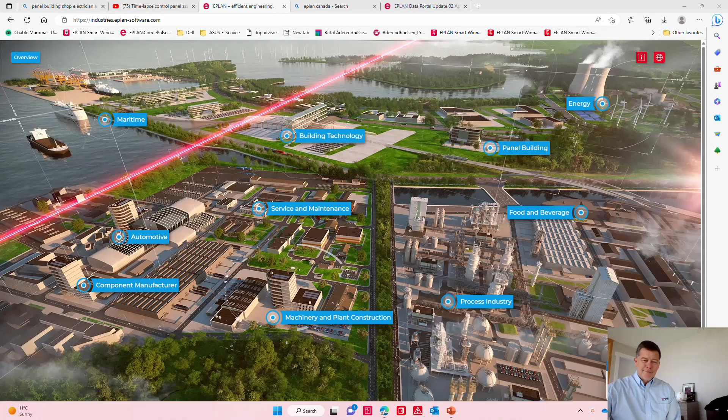Today I want to talk about something that is common to all these industries. If you look up our industries and where you can find some EPLAN Rittal, you will see something that is always commonly coming up. It's the panel shop. The panel shop at one point in time will always be part of the game.

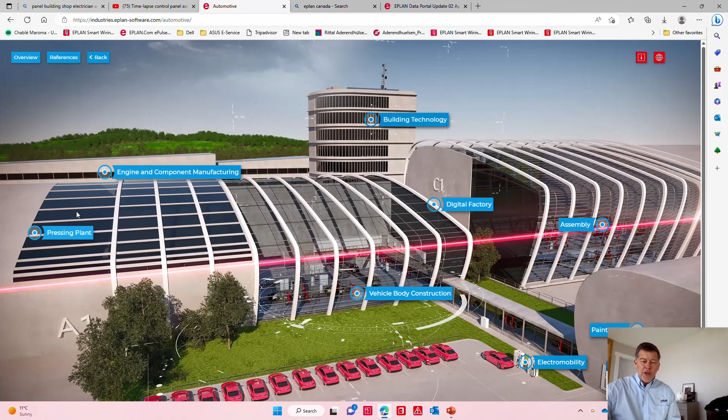So technically, I can take any of these industries. They always have sooner or later the specific panel building. So I can go through the individual areas, but at one point in time, every one of these industries comes down to this common denominator. They all have a switchgear and panel built.

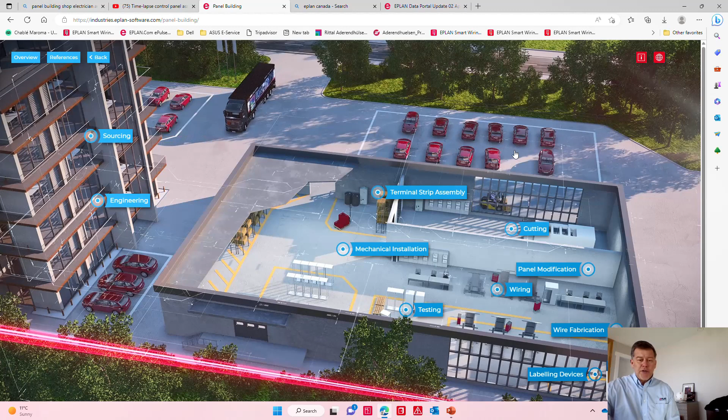So what I want to talk about today is how can we take this process that is here mostly done manually. And if you look in most of your shops, you will see this is all done manually. How can we actually optimize it? So technically, let's take a look here at this, and you will see I will be talking primarily about the Rittal integrated value chain.

So in the switchgear and panel building, we often will also talk about the efficient engineering when the plan becomes EPLAN. But really, you know what? It starts by optimizing your own manufacturing process. And we often don't think about this. The outcome, you will be able to deliver 33% faster by prefabricating wires. This is really the outcome of this.

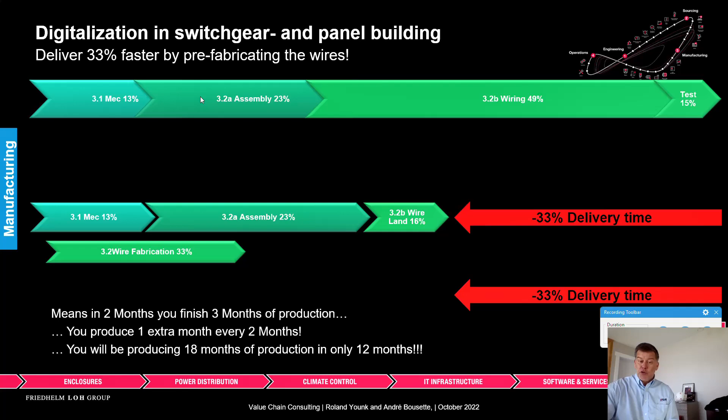What I will show you in this video is how we can save 33% of delivery. In other words, every 2 months, you have one extra month that can be produced. Think about it. 18 months of production in only 12 months. So of course, let's take a deeper dive into this.

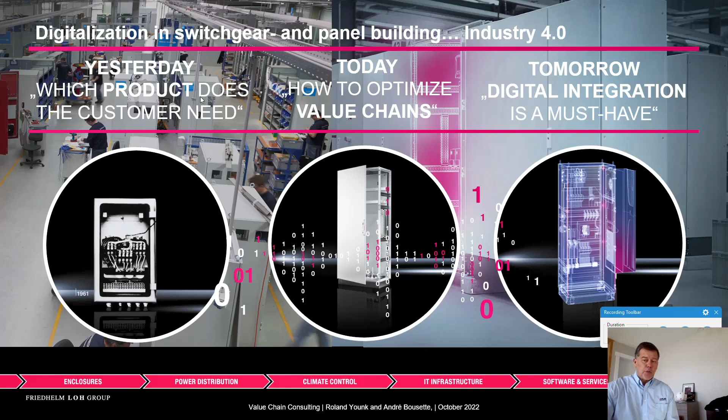First of all, yesterday, today, and tomorrow, we all know that within Industry 4.0, there is some digital integration that is a must-have, right? But let's talk first about the challenges every one of us in all industries faces. We all have increasing price pressure. We all have difficulties finding good personnel. We have the request from our customers to always deliver in shorter periods of time. And honestly, when we look at it deeper, we may have some inefficient operations. But let's take a look at how we can help you there.

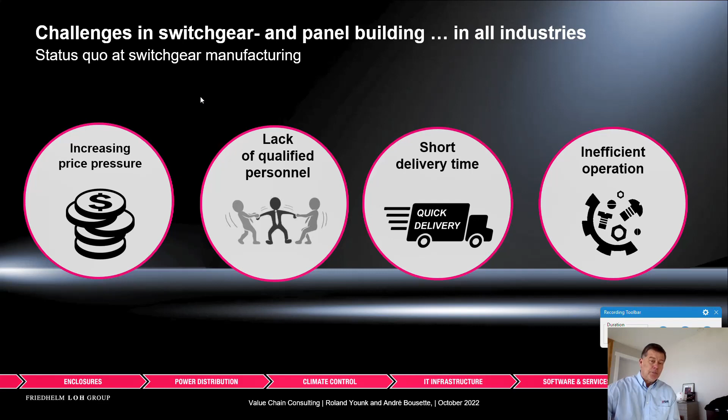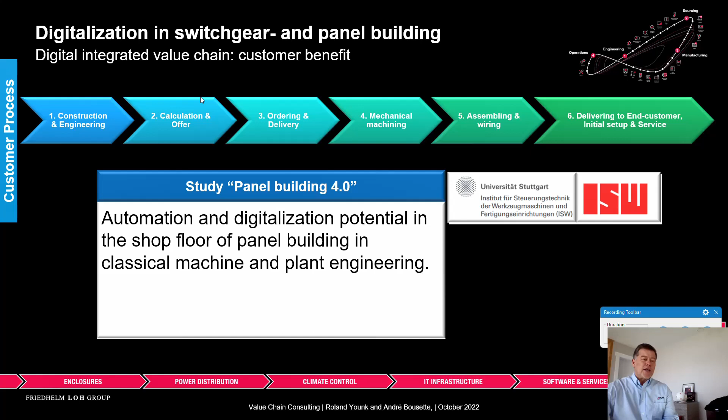So this is all based on a study that was started at the University of Stuttgart. So the numbers that I'm putting out here are not just randomly taken. They actually come from this study. I'm just going to recap this a little bit in this integrated value chain, and I'm going to talk about the digital workflow, because this is really where everything happens.

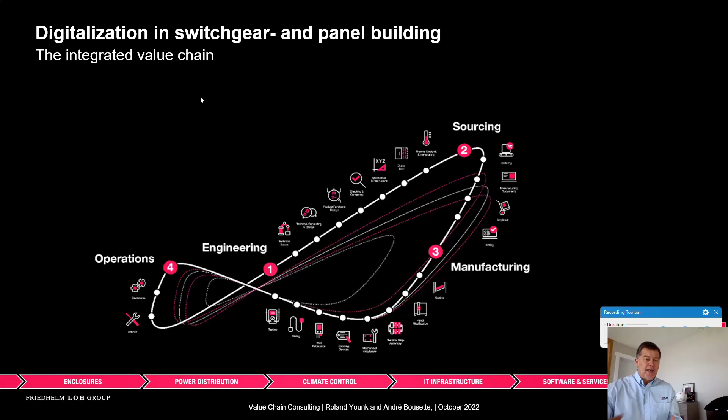The idea is, digitally, you want your data to serve everyone: the engineering people, the sourcing people that will be buying the components, the manufacturing people that will need it for drilling and cutting and eventually even wire preparations, even labels, and even for the operations for cables. So the idea is, let's make sure that the data that we actually use is always ready for the next step, so that every individual user only adds some real value to it and does not repeat any of the data that was already there.

And it really starts with this data portal, which is a cloud solution in which 438 manufacturers participate today. They have created over 1.4 million data sets to be used, dragged and dropped into your design, with the proper data to actually do the manufacturing afterwards. So technically, this is a little bit the global picture of how it works.

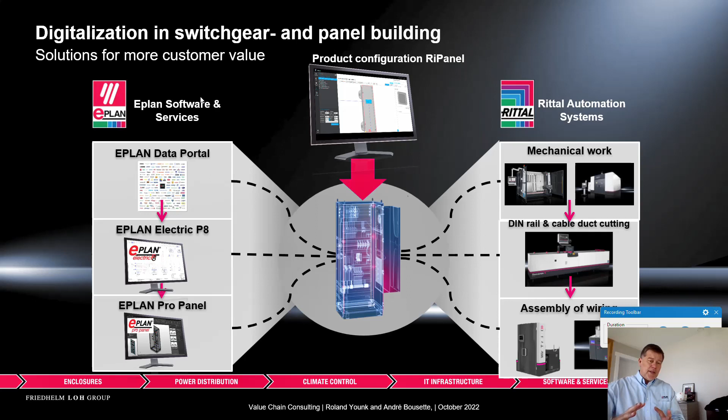The data portal provides you the parts, and the electrical schematics are done with Electric P8. Within Electric P8, you can also have ProPanel. ProPanel is the digital twin, and from that digital twin, not only do you have a perfect digital representation of your panel and its sizing, but you can also extract all the data for all the mechanical work afterwards, like drilling, cutting ducts and rails, and even cutting the wires. So this is the global, let's say, digital picture of what we offer.

Now, step by step, we try to organize this. We have come up with a certified system integrator concept in a 3-step process where we actually bring you to be better and better. Let's start with the first step. Everyone knows that today in classic design engineering, you have to do some schematics, some device tag numbering, some wire numbering, some cross-referencing, some bill of material.

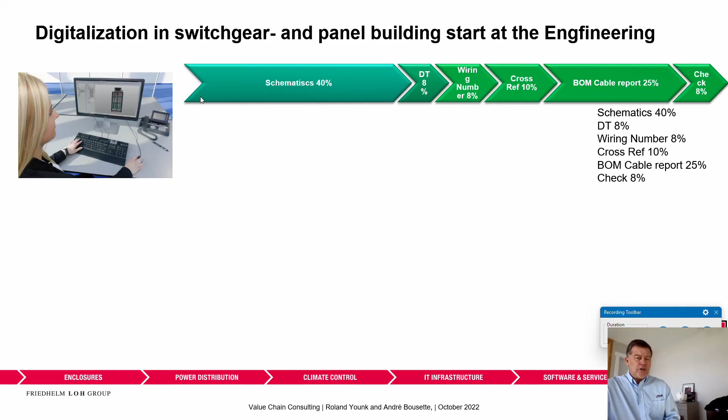These are tedious tasks that represent a certain volume of time that you can, with typical tools, only manage to a certain degree. Now, what is interesting with EPLAN, the core features of EPLAN and some standardization of EPLAN, we can actually reduce a lot of the time that you spend on device tag numbering, wire numbering, cross-referencing, even bill of material, because the tool itself, out of the data that is provided in the schematics, it can be generated automatically.

Device tag numbering, wire numbering is actually done automatically. Cross-referencing is a second nature to EPLAN. Bill of materials is just there. As you produce your drawings, your bill of material is perfect. And as you produce your digital twin, it actually gets completed with even more details on the terminal side, on the DIN rail side, and even all the mechanical accessories are actually then summed up in that bill of material.

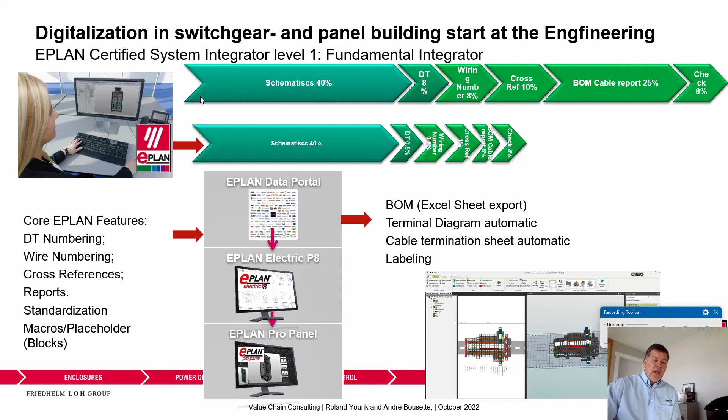All that data can be extracted, and when it's used to this level, we actually agree to give you the fundamental integrator level, and this is the first step. The second step is actually the advanced integrator. It's the digital twin. Now here, what's interesting is that you get not only the visual aspect of the digital twin that you can place in your panel.

But you can also benefit from the Perforex from Rittal. They have a mod center that can actually pre-produce all the drilling and cutouts on your panel before you even get it. So it's basically a task that you give away to Rittal, or you can actually buy the Perforex. So here, not only do you have a better quality documentation because you have this digital twin that you created, but also from that digital twin, you can expect the panels to be pre-drilled automatically because the data is actually incorporated into the digital twin.

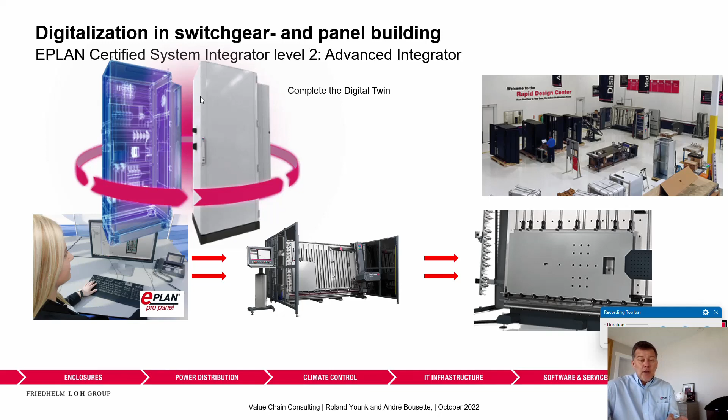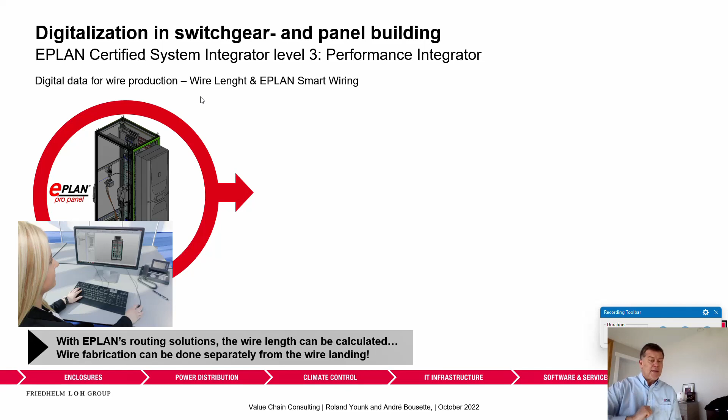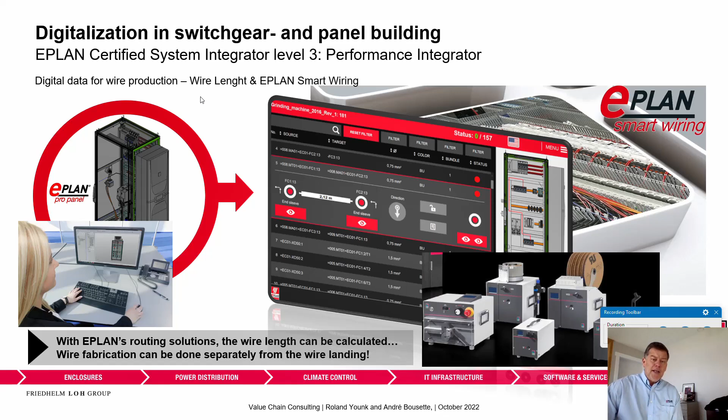Now, this, of course, is some time saving, quite interesting. Now, the performance integrator, he's going the next level. With EPLAN's routing solution, what he does, he actually calculates the length. And if you do have the length, you can now have some extra support with the smart wiring tool, Smart Production, and with these wire machines, cutters, crimpers, etc., that can help you prefabricate the wires. But really the clue here is the fact that you can prefabricate the wires.

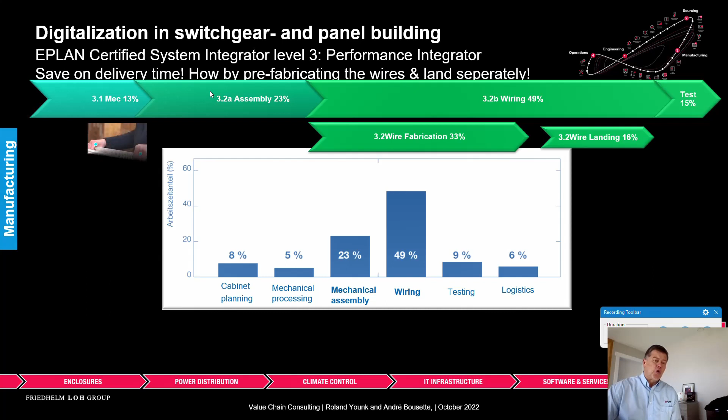Because let's take a look at a detailed panel shop when they build a panel. Step number one, of course, you always have to cut DIN rails, ducts. You have to assemble them onto the backplate. And only then, when all the parts are actually assembled on the backplate, can you start do the wiring. So you have to basically pull the wire, you have to cut the wire in the right length, you have to unstrip it, you have to crimp it, you have to put the labels on.

It's a tedious task that actually represents 49% of that time, out of which 33% are actually wire fabrication. Cutting, stripping, crimping, and labeling. Quite a big task in here. So what we say is if you actually do have the length, you could take this wire fabrication 33% and start fabricating the wires from day one.

Now, that means that while others are actually cutting the ducts, assembling the panel, putting the labels on, you can have some people prefabricate the wires or a machine prefabricate the wires. And you just have to do the wire landing. The wire landing is really the shortest time. We have smart wiring that can help you there. But the clue here is that by reorganizing your process, your manufacturing this way, you can deliver 33% faster because you have the wire fabrication done from day one and not only from the time that everything is assembled.

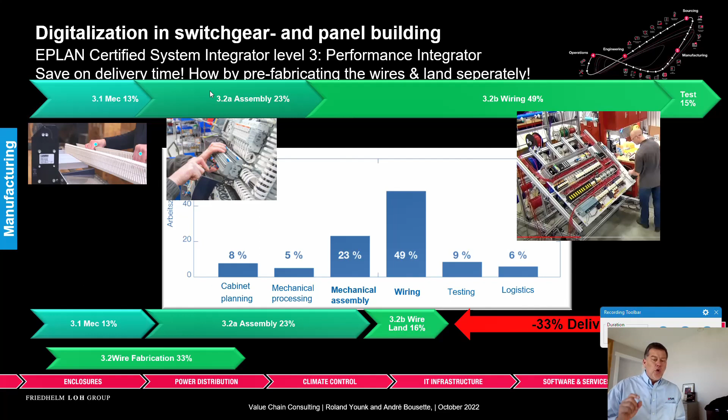This is just amazing. I mean, reorganizing your time in such a way, you're doing basically what the industry 1.0 has done, is to put in parallel these different tasks. Now, on shop, wire fabrication, cutting, stripping, and crimping can be done by anyone. You do not need electricians to do this. So qualified labor is not necessarily required. Your qualified labor will do what he does best: land the wires and do all the rest, the testing and operations.

This is how we help you step by step to become a better and more efficient certified system integrator. Level 1, level 2, level 3. Come and talk about it with any of our EPLAN specialists. We all can help you there.